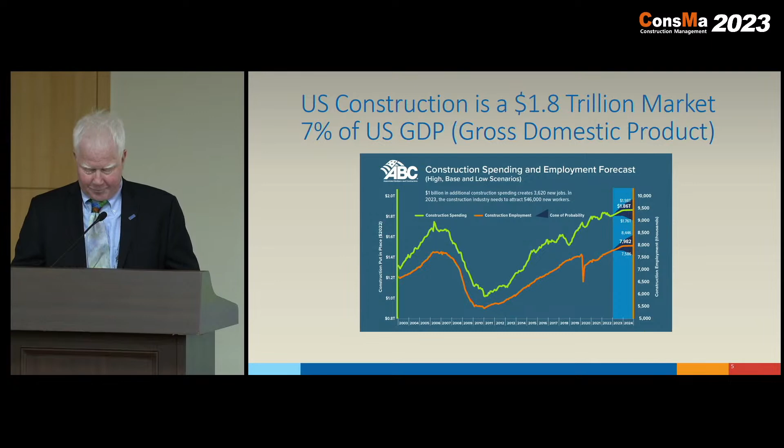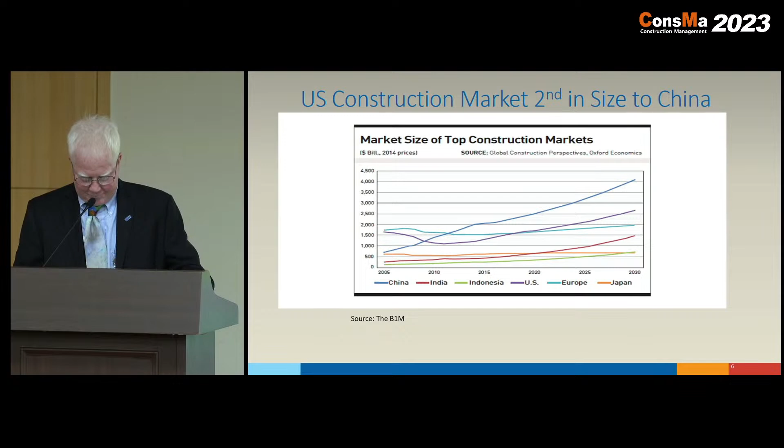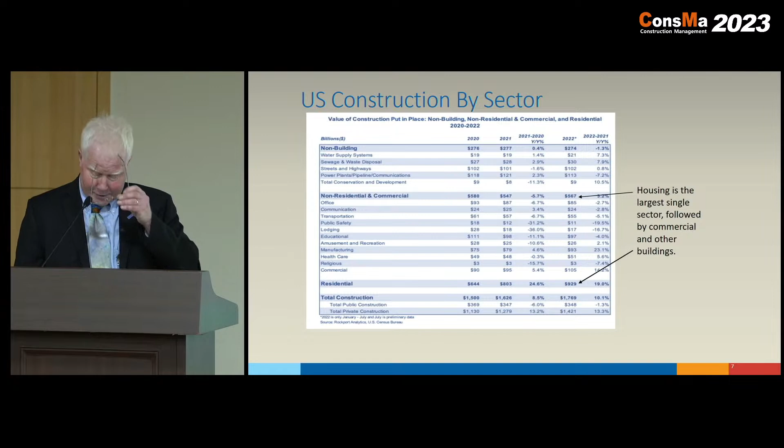Then roads and bridges. In terms of a breakdown between public and private construction, the public market, that of government agencies and public funding, is about $350 billion a year annually, and the other $1.4 trillion is in the private market. About 60% of the public market is focused on infrastructure, roads, bridges, tunnels, treatment plants, that kind of thing. Whereas the private market's major part is housing, followed by buildings and then power.

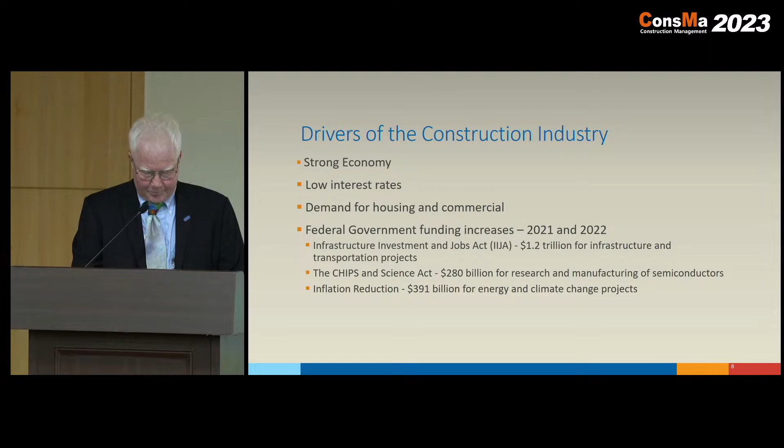We have a very large and diverse construction contractor market in the U.S. as well. Every year, Engineering News Record, one of our leading construction publications, publishes a list of the top contractors in the U.S. So the last list was in 2021, and the top 400 contractors generated about $425 billion US worth of revenue in 2021. Not surprisingly, a lot of that revenue was driven by buildings with 57%, followed by transportation with 15%.

And as I mentioned, the contractors have fully recovered from COVID 2020. And if we look and break down that top 400, the top 100, the revenues for those top 100 range from a low of 925 million to a high of 16 billion. So quite significant, and we have quite a diverse construction contractor community.

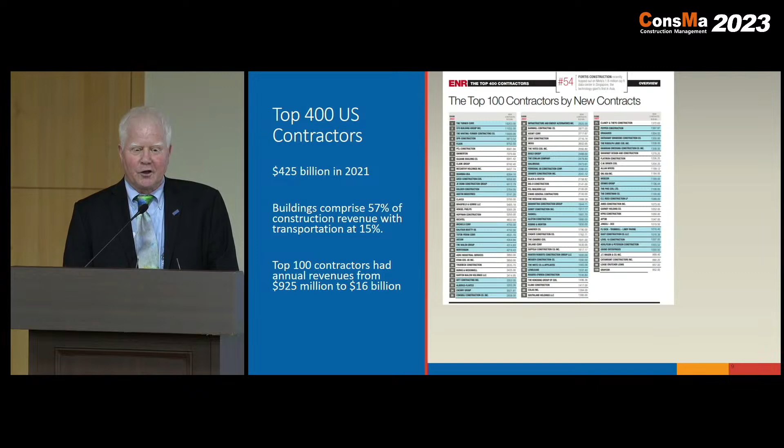But interesting to me, at least, there are no U.S. construction contractors within the 10 largest construction contractors in the world. If you look at that list, 8 out of the 10 are Chinese. So the Chinese contractors are really dominating, at least in the world global market in terms of size. The U.S. is a significant player, but the Chinese really dominate that global listing of top contractors by revenue.

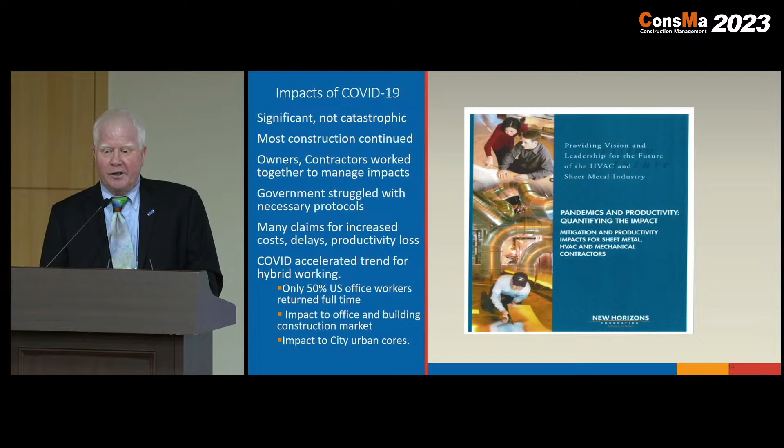As an example, in California, I worked 2 years during COVID on a big wastewater treatment program in San Jose, California, $1.2 billion. In San Jose, the local city, as well as the state of California, issued regulations that required contractors to pay workers who needed to take time off for either COVID because they were sick with COVID, or they had to care for someone in their family who had COVID. And the regulations required the contractors to continue to pay them their wages so that obviously they could continue to receive an income and the construction could continue. So the government struggled, but they worked hard to try and support the construction industry during those tough times in COVID.

One thing that COVID did do was really accelerate a long-term trend that had been growing, which was the way people work. And in the US today, hybrid working is here, and in my view, it's here to stay.

Right now, only about 50% of office buildings in the US are fully occupied by people working full-time in the office. And despite all the efforts by owners and employers to get their people to come back full-time, people don't want to come back, and I don't think they're going to be coming back.

And the implications for the commercial and building market are quite significant, both in terms of future construction. I think that market is going to significantly reduce over time, but also there are a lot of building owners and banks who are holding loans on those buildings that are potentially looking at a significant financial impact. Some people are predicting a major crash in the office building market over the next few years because of this issue of hybrid working and the fact that people just don't want to come back full-time to the office.

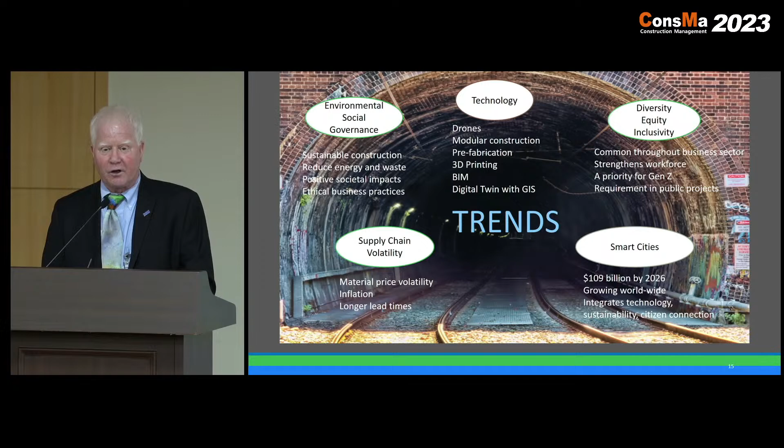I'm working on a military program now, and the military client there is very much interested in building smart cities as part of their military facilities. The focus around smart cities is really to integrate technology, sustainability, and to connect all of the people living in those communities together in a sustainable and efficient way. So I think we're going to see a huge growth in the smart cities movement going forward.

There are also significant challenges, and as I said earlier, there are many challenges. These are 5 that struck me as being significant to the U.S. construction industry. Two of these I consider to be rather immediate, and we really need to try and solve these.

The first of them is around economic issues, the threat of recession we're hearing about, the continued inflation, supply chain issues continuing. The second is, as I mentioned earlier, the workforce gaps, the need for more workers, the need to replace workers who are retiring, the need to do more training. These are immediate issues, but unfortunately, in my view, these are issues that are really beyond the control of the construction industry itself to solve. These are more macro factors, and it's really difficult to predict how they will play out over the next years, but they will have a real impact on the shape of our construction going forward.

The other challenges, I think, are longer term. One is the continuing stagnation, decline in construction productivity. Since 1970, studies have shown that there's been very little growth in construction productivity, and in some places, such as studies have shown in the US, construction productivity has actually declined. It's unclear why—there are many reasons, and no clear solution yet in mind for this.

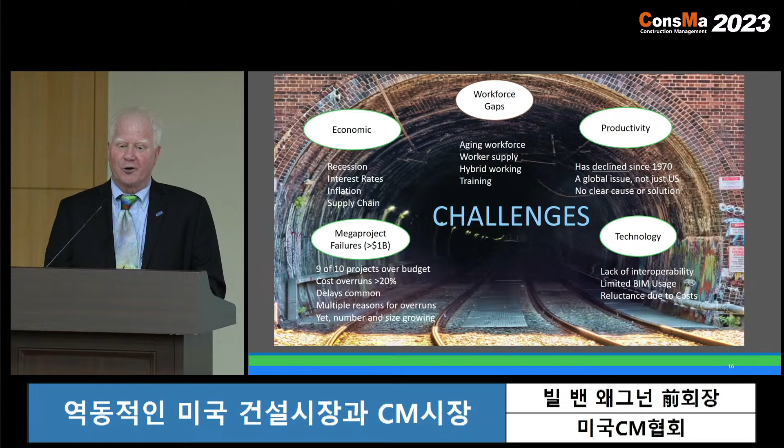But what is interesting is, despite all of the problems and the overruns in megaprojects, we continue to build megaprojects, and in fact, the forecasts are showing that we're going to continue to build more megaprojects, and the projects are going to get bigger over time. So that's just something that we in the construction industry are going to have to deal with, because I don't think there's a ready solution for that right now.

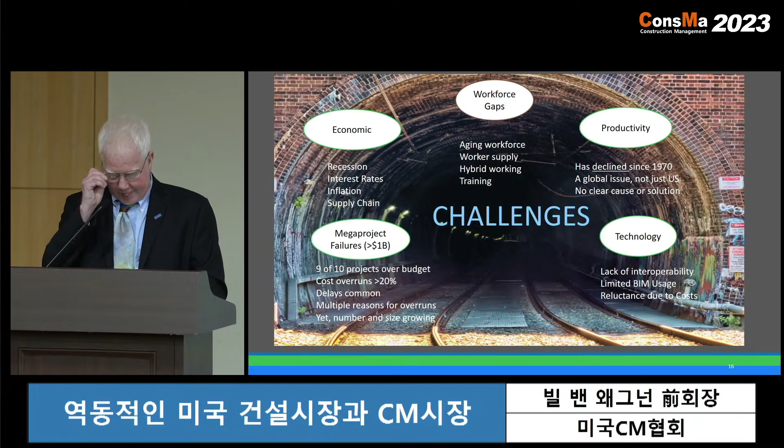So let me turn a little bit to the US CM industry, just a brief overview of where we are in the construction management industry.

Like construction, program and construction management are doing very well and are showing solid growth, having fully recovered from COVID. ENR publishes annually a listing of CM and program management fees. In the last issue, for 2021, $24.5 billion worth of program and construction management fees were generated by CM and program management professional firms in the US. Of that, over $16 billion was in program management, and nearly $8 billion was in the construction management profession.

That breaks down, if we want to split it between international and domestic, about $18 billion is in the US and about $6 billion internationally. So it kind of indicates to you that, like our contractors, we are very much a US-focused industry. We do a lot of work internationally, but unlike other countries, much of our construction business is really driven by demand and need in the US itself.

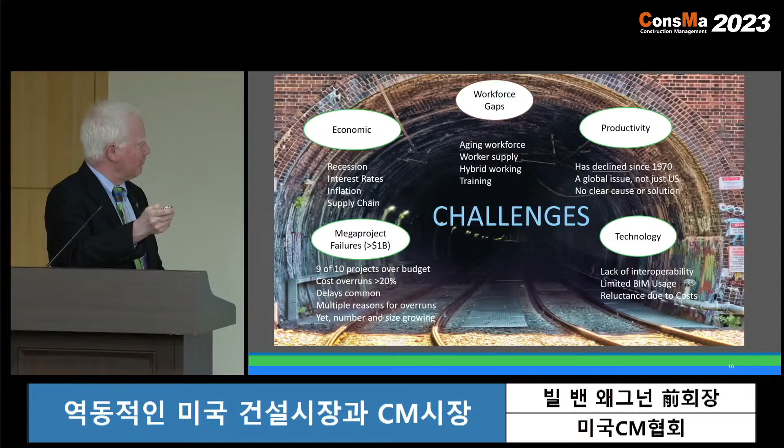I have one more slide. I don't know where I'm... okay, there we go.

Thank you. All right, big unknown, artificial intelligence. I'm sure many of you have been hearing about this. Some experts and pundits out there are predicting that artificial intelligence is going to be a major transformation to mankind on the order of some of the other major transformations over the history of man. Time will tell, but I can tell you from what I've been reading and seeing that it is moving very, very quickly.

To give you a personal story, in putting this presentation together I spent quite a bit of time collecting research material from a lot of different sources on the construction market, CM, and so forth. After I did that, I signed up for ChatGPT. Many of you may have heard of ChatGPT. I went in there and typed, give me a 5-page paper on the state of the US construction market and the trends and challenges. I was shocked, it nailed it. It covered everything that my research had found, and it was very accurate, very few mistakes in there. So that's just one small example.

But I think AI is real. I have no idea how it's going to impact construction, but I'm certain it's something our industry is going to have to deal with, just like other industries across the world right now. I think it's here and it's going to continue to grow. So with that, I want to thank you very much for listening and being a great audience, and I really look forward to the other presentations for the rest of today and tomorrow. Thank you very much.

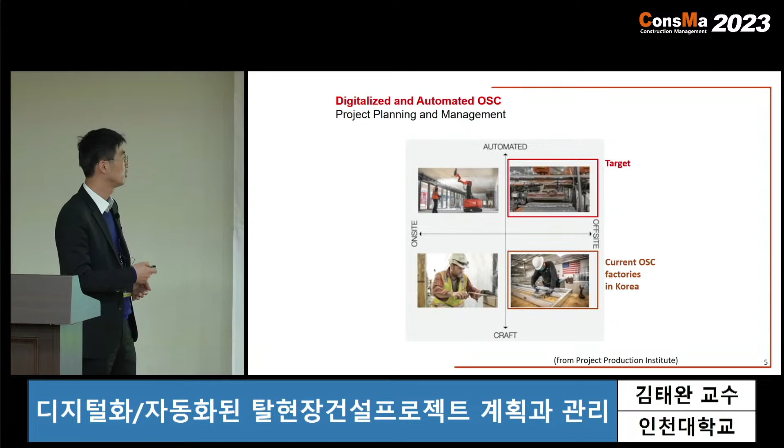The question comes down to how to do that. I don't know actually, but one answer might be digitalization and automation of offsite construction projects. This figure is from the Project Production Institute, and it suggests two dimensions: one is on-site versus off-site, and the other is automated versus craft or manual. According to these two dimensions, we have some construction projects that are on-site and automated, and some projects that are off-site and manual.

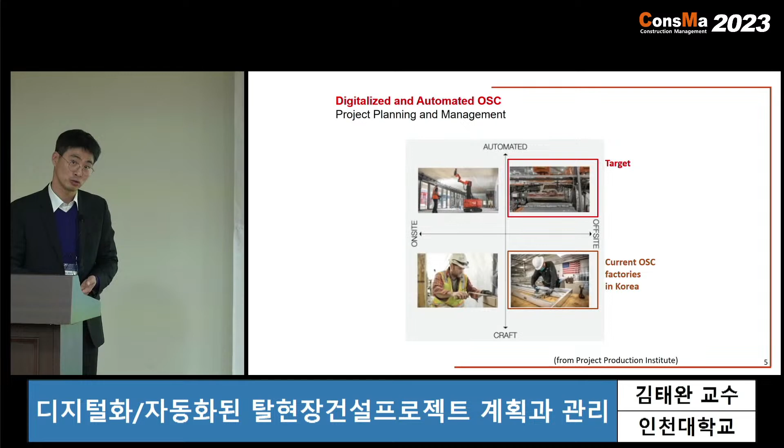My observation is that in Korea currently, most offsite construction project factories are off-site but craft, meaning they are producing building components manually under the roof. So we are still having some productivity issues. My goal, my view, is that we need to move towards automated offsite construction project management.

This digital data can be interpreted by computer without human intervention - that's the benefit of digital data. Digital data can include BIM (building information model), and also workplace models, process models, and supply chain models, etc. When we have these models digitalized, capturing the reality, then artificial intelligence comes in, with data science.

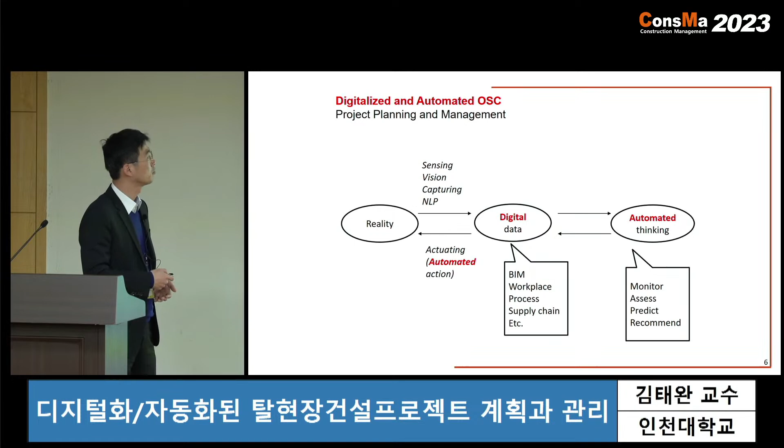Building information model can play an important role in the digitization and automation of your project. I did some study using real case offsite construction project cases, called qualitative comparative analysis. The goal of this research was to find some leading indicators that can cause schedule delay in your project. I took QCA, qualitative comparative analysis, as a method because it can give you some idea about the combinatorial effects of different project conditions - with the combination of some conditions, you can actually see some effects.

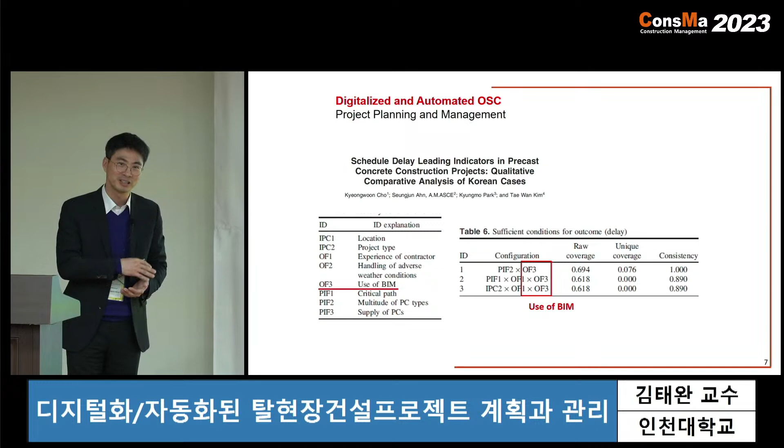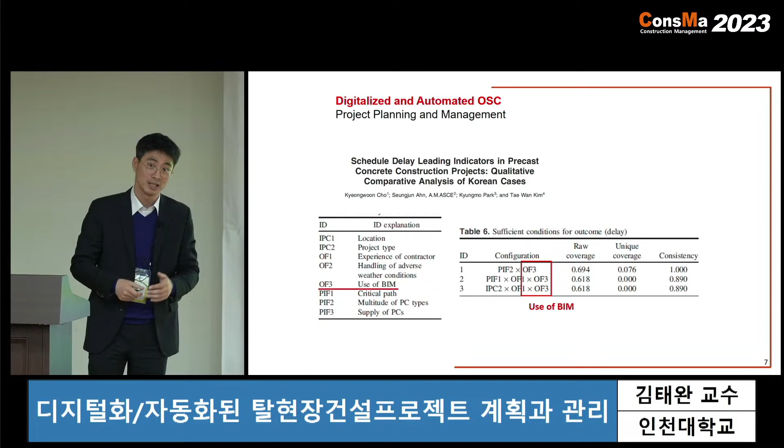So it means that if your project doesn't use a BIM and you have little experience in offsite construction projects, your project is likely to be delayed. Or if you don't use a BIM and you have multiple types of precast concrete components to handle in your project, that reminds us of complexity, and then your project will likely be delayed.

Okay, so BIM actually is still playing a fundamental role in the offsite construction project.

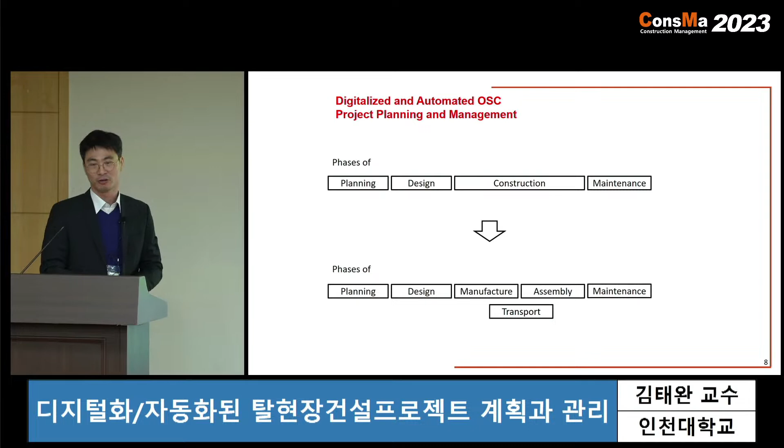Let me talk about the project planning and management of offsite construction projects. Let me talk about the phases first. As a construction manager, we divide our project into different phases when we think that major deliverables are very different from phase to phase, and the way of work is very different from phase to phase due to the nature of your work. You need to manage it differently from phase to phase, so we divide our projects into different phases.

Traditionally in the stick-built construction system, how we divide our project into phases is like this: we have planning phase, design phase, construction phase, and maintenance phase. And we try to manage each of the phases.

When we shift our gears and move towards offsite construction project management, some phases are very similar - so planning, design, and maintenance phases. But the construction phase should be divided into several phases because many parts of your building components are now produced in a factory environment. Then it can be divided into two: manufacture phase and assembly phase.

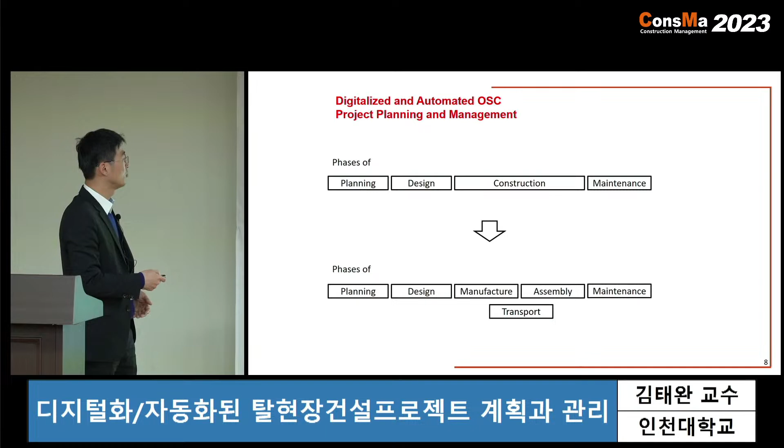In the manufacture phase, the major deliverables are the produced components that are stacked at the factory. In the assembly phase, the major deliverable is your final building, where all of those components come and are installed into one piece. Because the location of production and the location of installation are different geographically, we need to add one more phase, called the transport phase.

Transport phase is very important in offsite construction project management because the transport cost takes only 5 to 10% of your project, but failure in managing this phase can lead to a disaster situation for your project.

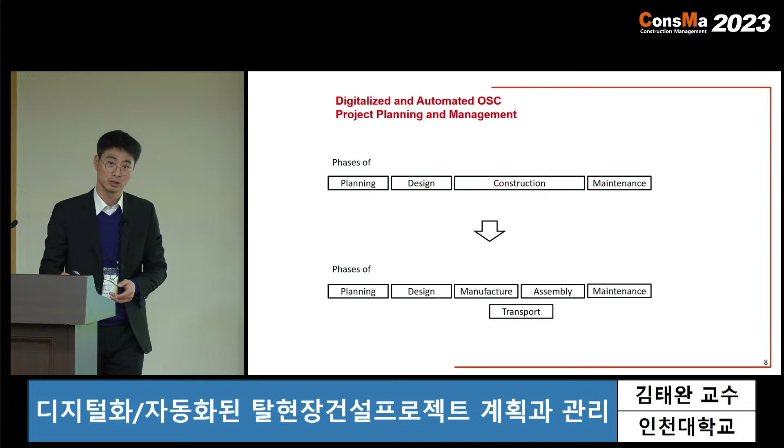So let's assume we are a construction manager. You are on the job site, and you need to do some work according to the schedule. What can you do when some components are not delivered on time to your job site? All you can do is wait until the components are delivered. So it actually causes a lot of damage to your project, but we have little knowledge about how to manage this transport.

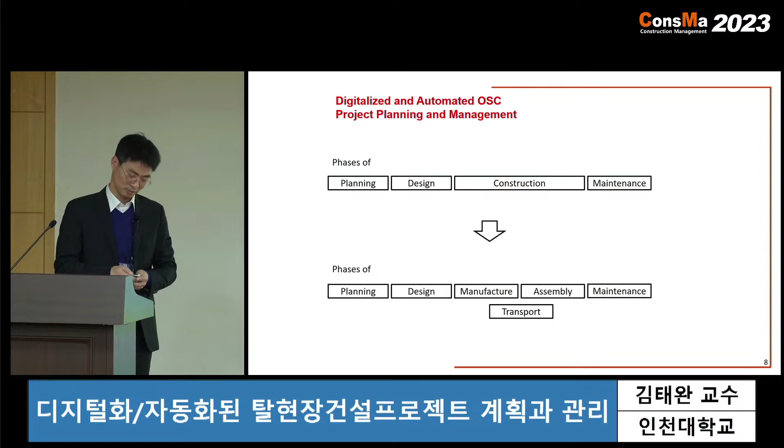So many researchers put research effort into offsite construction project management, but most of the effort is focused on manufacturing and assembly phases. My expectation is that researchers will cover all of these phases with more and more effort in the future.

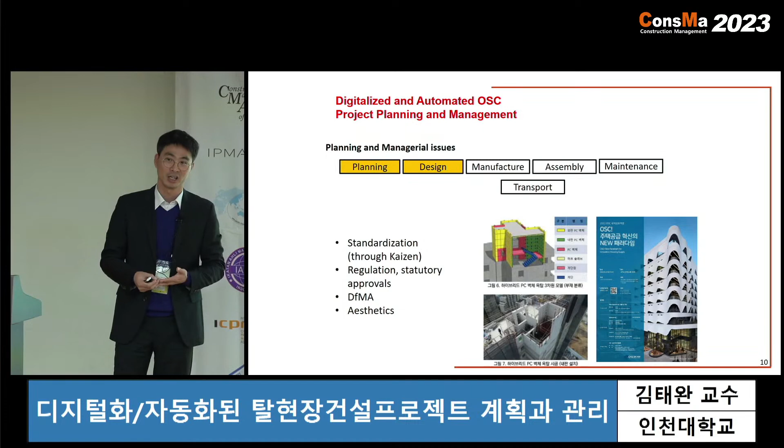DFMA, design for manufacturing and assembly, is another big topic. This is different from constructability, because now we need to think about ergonomics in the factory environment and the construction environment in different ways. And aesthetics—some people still think offsite construction produced buildings are ugly. Somehow we need to prove that this is not always the case. That's the issue I can think of.

In the manufacture phase, this is actually a difficult part in managing offsite construction projects, because in many cases we have little knowledge about how to manage the manufacture phase. One is mold scheduling, which is very important because it affects production productivity in the factory. Many researchers are optimizing mold scheduling, but my observation is that construction managers or production managers still use their gut or intuition to develop this schedule. We are human beings, so we are error prone.

There must be a lot of other good solutions for scheduling molds, but we are losing those chances. And factory yard utilization—one factory has multiple job sites, so you produce components for different projects and stack those products on the yard. But we still don't know how to manage those yards, so we are spending a lot of land. Sometimes we have difficulty finding exact locations for each component, and quality management. So we need to know how to utilize our yard and factories.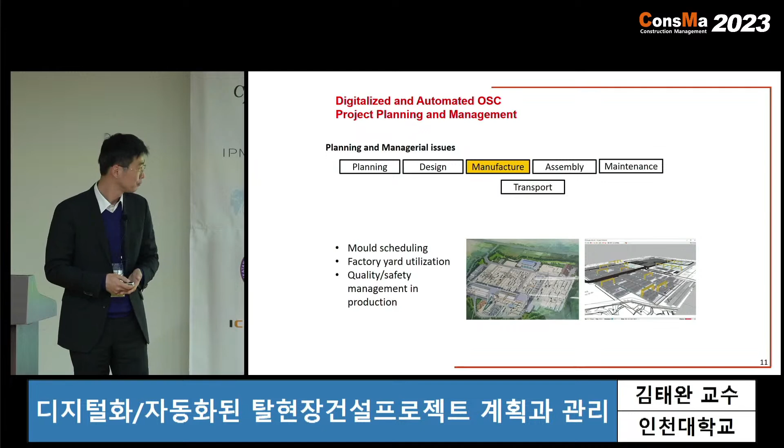Quality and safety management in production is also another issue. When we think about the factory environment, it should be very similar to management sciences dealing with manufacturing industries like smart factories. Those two are very similar, but the major difference between the manufacturing industry and our industry is that each component we are making is very big and heavy to handle. We need to think differently about the ergonomics of people making those components, and specialize in our own way in managing factory production.

In the transport phase, supply chain and logistics management is getting more and more important worldwide across all industries. We are facing different opportunities and challenges in our project management. This is another big issue we need to solve.

Routing and tracking—you need to make decisions on delivery routes and track where those trucks are. Korea has a small land area, so this is not a big issue there. When you order food at night, the next morning the food is in front of your door—wonderful, right? So it's not a big issue. But when your country has a very big land area, like mainland China or the US, this is another issue you need to handle carefully.

Component vehicle allocation—you don't put all the materials for one project into one truck and send them all to the job site. You need to order multiple trucks and allocate different materials to different trucks. This affects the number of trucks, the installation sequence, and productivity at the job site. We need to allocate components properly onto different vehicles, but we still have little knowledge about how to manage these issues.

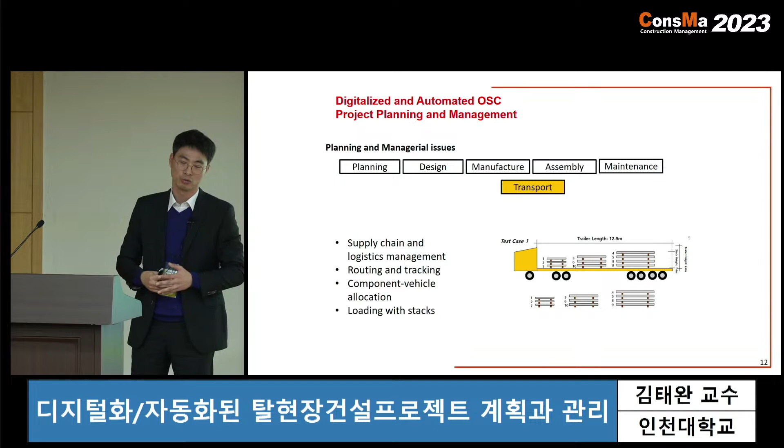Loading with stacks—because the truck has limited space, we stack components to save truck space. Stacking isn't easy, because ill-stacked components cause instability problems and affect the quality of components. When you deliver materials to the job site, they may find defects in your components. It also affects installation at the job site—when they have an installation sequence that differs from your stack sequence, the job site needs to handle those differences to place materials at the final location.

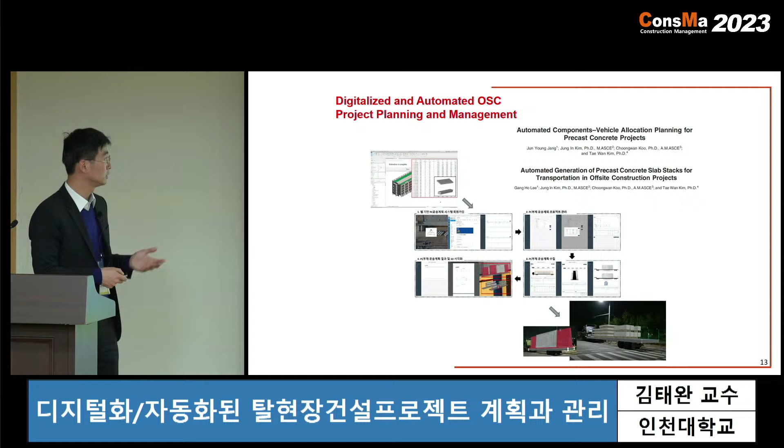I have conducted some research and then developed a tool to help construction managers in the transport phase. This is an example of how we can help people.

Using the Revit API, we can export important component information from BIM directly. I developed a tool that can generate transport plans. It can automatically allocate components onto different vehicles properly, and then develop stack generation plans.

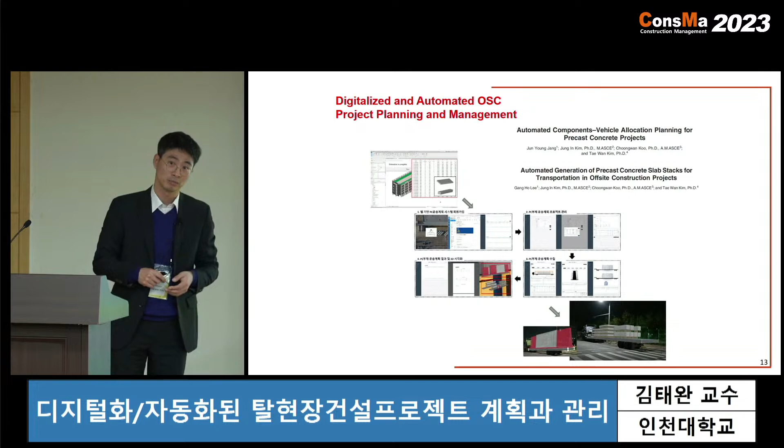Using the HoloLens or the AR gadget, you can see the transport plans on the real trailer, how those are stacked and put. This can help transport managers and construction managers develop and finalize transport plans.

And assembly phases, right? In assembly phase, we need assembly modeling and guidance for the installers. Assembly model is different from BIM because it needs to provide information on what sequence you need to install, and when and how.

With those detailed plans, you can reduce mistakes, and it can enhance productivity on the job site.

Installation sequence still depends on the intuition of construction managers, that's what I have observed. With different types of materials, components, locations, and logics, there can be multiple ways of sequencing the installation. But under time pressure, construction managers just manually and intuitively develop the installation sequence. Sometimes it's not productive, that's what I have observed.

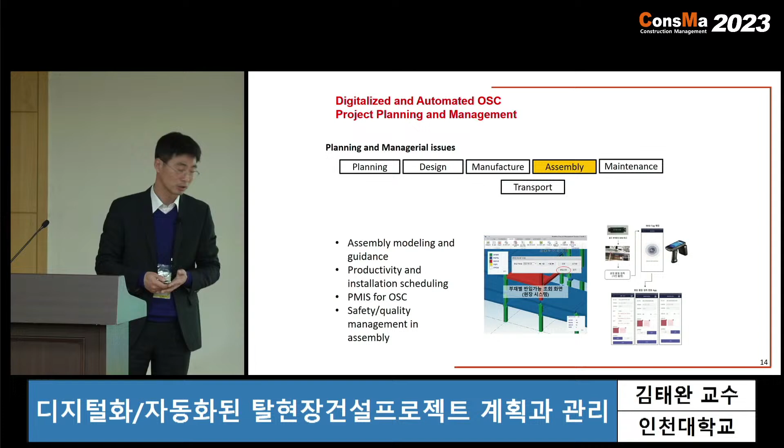I went to the job site and measured how long it takes to install each and every component on the job site, and then asked the managers about their expected time for installing these pieces. The answer was that it takes 3 to 7 minutes to install each element, so they plan based on that assumption.

But the reality, from my observation, is that many elements are installed outside those expected ranges. This is just one case study, but what we can say is that we need more real case data. We have little data about how we install and manage installation in offsite construction projects.

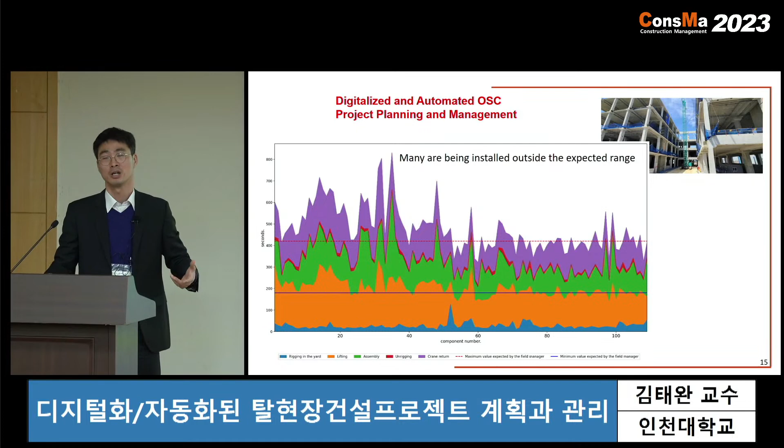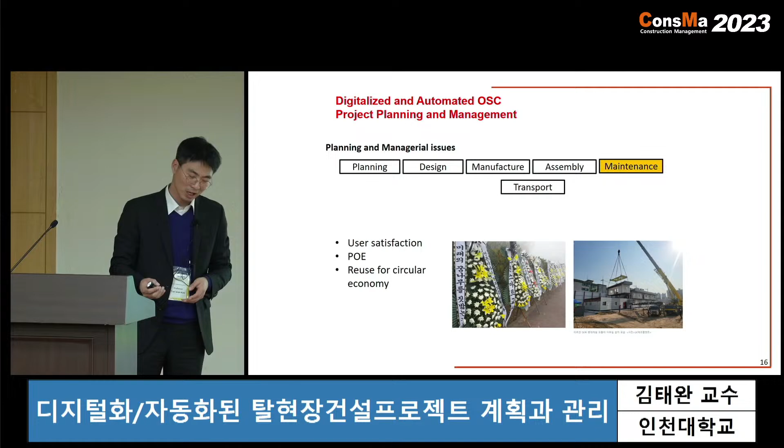We need to gather more data, analyze it, and acquire more knowledge about how we currently manage, and how we can improve those management techniques. That's why we study again and again and put our efforts into the research.

Lastly, the maintenance phase. We need to gauge user satisfaction and boost it up, because they are the final users of the building. Without their approval, it's very difficult to adopt offsite construction in our industry.

It's a different story than the productivity issue. We need to persuade people so they can accept the concept of offsite construction. We also need post-occupancy evaluation, and management technologies or techniques for reusing and recycling wasted materials for circular economies.

All of these topics are challenges that prevent us from gaining the full potential of offsite construction projects.

When the car was invented, people said there were a lot of challenges to overcome, that this is not possible, that they preferred horses. People resisted using cars. But now, what I see is all cars on the road, we don't see horses regularly anymore. I like horses, but we can't see them on the road regularly.

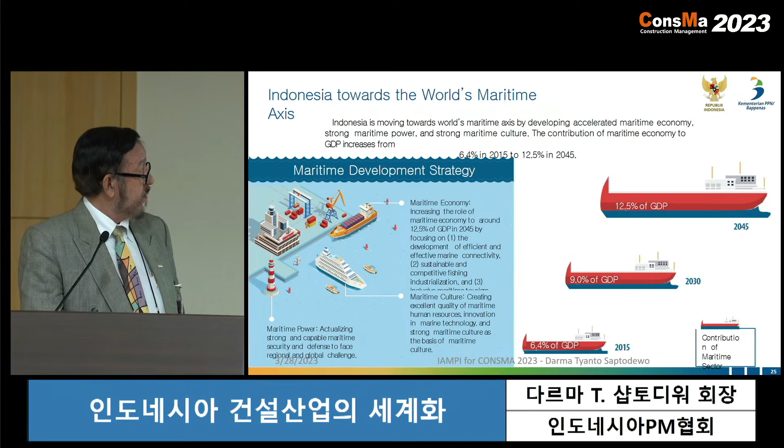Enhancement of water security is one of the environment strategies. Water security is increased to support strategic sectors, disaster mitigation, and increase community welfare. So we will develop processing and water quality enhancement technology that is cheap and environment friendly.

Development of rainwater harvesting, improvement of land management along river basin areas by involving the community, development of city forests, integrated and sustainable management of lakes, swamps, ponds, rivers, and other land water, forest and land rehabilitation along priority river basin areas, development of infrastructure to prevent erosion and sedimentation, development of water resources infrastructure, implementation of water use efficiency principles through reduce, reuse, and recycle principles, improvement of hydrology, hydrometeorology, and hydrogeology information systems, and development of river basin area and water resource monitoring systems.

Regarding energy security, we will increase renewable energy from 5% in 2015 up to 31% in 2050. But the rest will still have natural gas, coal at 25%, and oil, with the possibility of using nuclear energy if other energy sources do not meet demand. But this is the last choice, to build nuclear energy only if it's needed by the infrastructure development of the country.

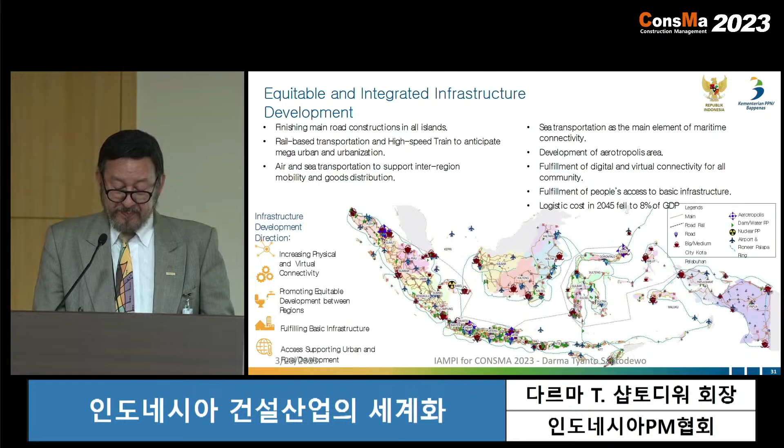Strengthening national resilience and governance. National resilience and governance become stronger with better quality democracy, institutional and bureaucratic reform, development of the national justice system and anti-corruption, implementation of free and active international politics, and strong security and defense.

Foreign affairs: the implementation of free and active international politics. This will be the strategy for Indonesia, increasing its role regionally and globally in the United Nations. Indonesia is conducting international politics that is free and active to build just world governance, becoming a developed and independent country and one of the most influential countries in the Asia Pacific. International politics is also directed to implement the World Maritime Axis Roadmap and establish regional arrangements, including maintaining ASEAN centrality.

We also have defense and security: inclusive community order, strong defense, and dignified human security. Indonesian identity goes beyond ethnic, tribe, religion, race, and group identity, with a participative community order based on fairness and equality in unity and national insight. Strong national defense power is based on smart power, with an expenditure of 1.5% of GDP.

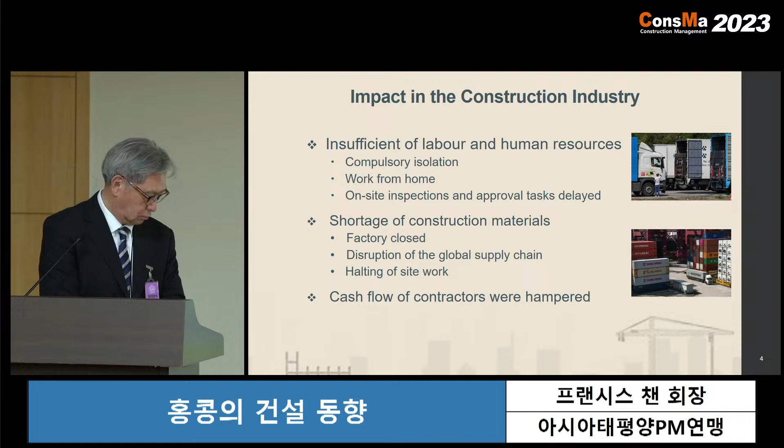Under the novel coronavirus epidemic, many industries in Hong Kong were affected. The Hong Kong government launched 2 rounds of anti-epidemic funds, providing a total of over 5.5 billion Hong Kong dollars to support construction workers and other enterprises, strengthening epidemic prevention and helping with economic difficulties.

Normally, government works contracts contain provisions stipulating completion deadlines to ensure the timely completion of projects. In case of any delay, contractors are required to apply for an extension with convincing reasons. During the COVID-19 period, the government understood the difficult situation, from project design, manpower deployment, supply of materials, to the construction process - all these aspects affected project progress.

Because of substantial impacts caused by different waves of the epidemic, the Development Bureau of the Hong Kong government announced that for in-progress government works contracts, the government would flexibly handle extension requests from contractors for up to a maximum period of 6 months.

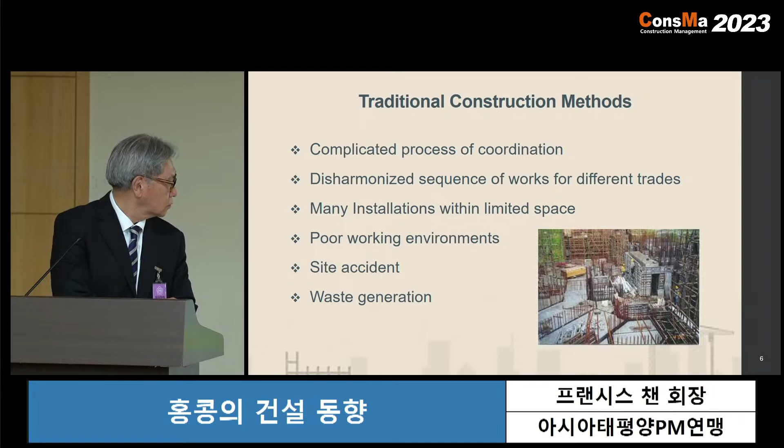Although today's MIC provides a solution for several problems in the construction sectors, it was not so popular in Hong Kong before COVID-19, even with many promotions from governments or related associations. As mentioned previously, during the almost 3 years COVID-19 period, the industry faced a lot of problems such as lack of workers, shortage of construction material, etc.

In order to complete projects in time with the required quality, more building developers and contractors try to adopt MIC in private projects. Most of them find that MIC methods not only save construction time with better quality compared with traditional methods, MIC methods can also minimize unpredicted problems, such as reducing injuries and accidents.

During modular construction, modules are constructed in the factory and site works can be operated at the same time. So the construction speed also increased and shortened the project lifetime. This also helped to solve the huge housing demand problems in Hong Kong.

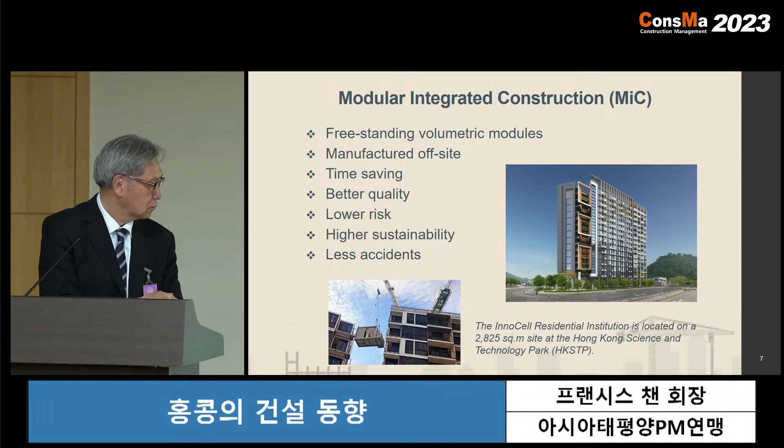Multi-trade integrates mechanical, electrical, and plumbing. This is considered a continuation of the success of MIC for the construction industry, which refers to the integration of multi-trade building services components into a single assembly of prefabrication modules.

Similar to MIC, MiMEP is manufactured in a factory and then transported to the site for collection of modules. Various trades of building services only need to install it in situ. The MiMEP construction method has the benefit of reducing on-site labor demand and not being affected by site constraints.

With the adoption of these two innovative construction methods, it can not only contribute to enhancing the quality of construction and mitigating environmental impacts like carbon emissions and waste generation, but also help relieve the challenges the Hong Kong construction industry is facing, including the demand of workforce, aging of skilled labor, site safety, and high demand of construction productivity, especially in challenging times.

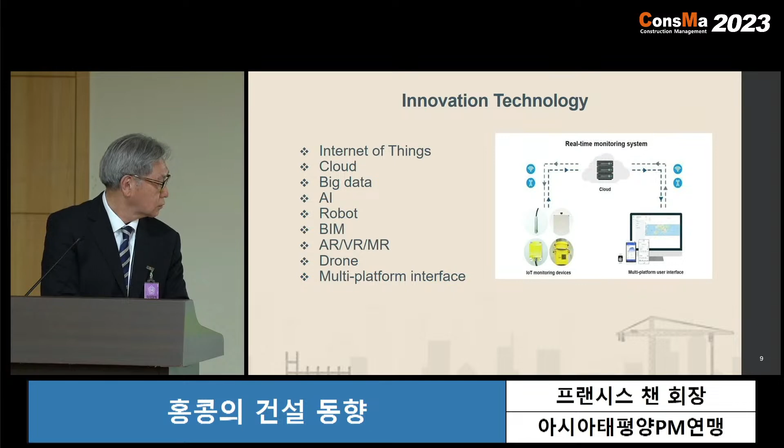BIM, as you may know, is a process that has revolutionized how construction projects are planned and executed. It allows the construction manager to create virtual project models that can be analyzed and modified before any physical work begins, so many of the inefficiencies and problems that arise during the construction process can be eliminated.

Digital BIM models allow for sharing, collaborating, and visualizing that paper drawing sets do not. With cloud-based tools, BIM collaboration can occur across all disciplines within the project, allowing working teams to share project models and coordinate planning, ensuring all stakeholders have insight into the project.

Cloud access also allows project teams to take the office to the field. Project teams can review drawings and models on site and on their mobile devices, ensuring they have access to up-to-date project information anytime, avoiding last-minute changes, and minimizing unforeseen issues by enabling easy reviewing and commenting across multiple disciplines.

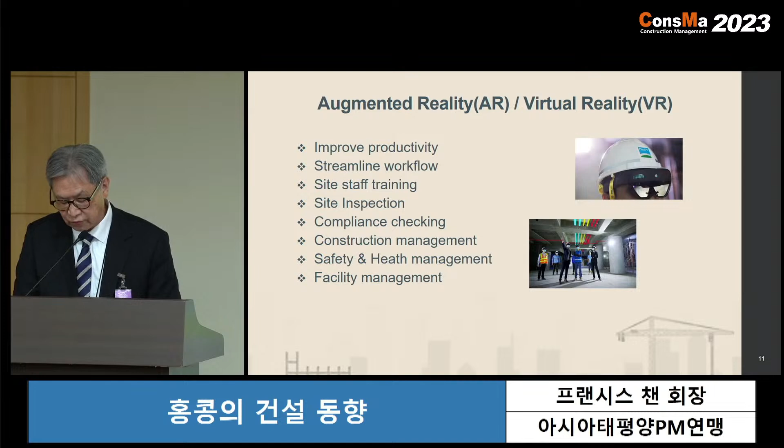With 5G connectivity to support large BIM files and live video streaming, Microsoft HoloLens can demonstrate and visualize planned building works within limited working space at site, without removal of the ceiling. It integrates the BIM model with actual work at site, providing clear visualization. This remote inspection provides real-time information for stakeholder meetings at their locations.

A drone is a remotely piloted aircraft technology development. Contractors and engineers can use drones to collect real-time data about projects and understand what is happening on their site. Project managers and site inspectors can also use drone technology to conduct job site inspections, identifying potential hazard risks on their work site from different angles, with no need to go to the site physically. A drone can also fly into hard-to-reach areas, reducing potential accidents and improving job site safety.

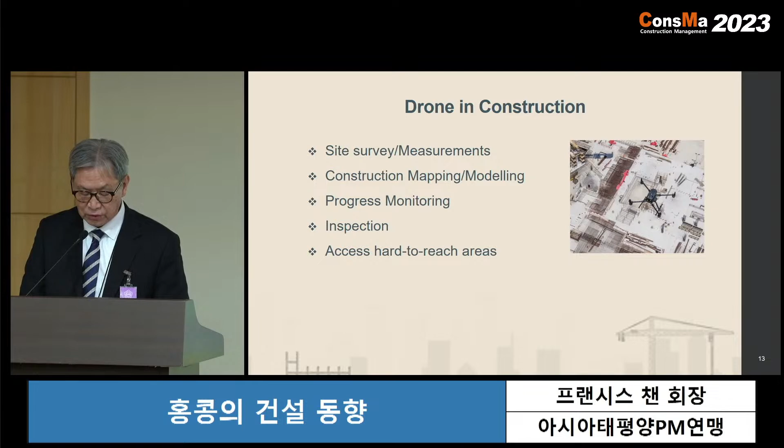For aerial photos, the drone takes photographs of the entire construction site from the air. The result may be slightly less detailed than interior reality capture because they typically work with photography instead of laser measurement. Despite this, once the photos are gathered by flying intricate patterns over a project, they are combined using a photogrammetry method to create 3D models. Some objects, such as trees and power lines, can also be captured. This information can be used in the design process, such as doing a cut and fill analysis of a site. Architects and engineers may discover that less soil needs to be moved on large projects, ultimately saving on cost.

The Access Control Recording System, or ACRS, combines MIC contract, AI technology, and contactless biometric identification. All site staff only scan their faces without touching anything when entering or exiting the site. All related data is generated and recorded automatically, and is very precise even under varying light conditions. The data can be used for site staff management, such as calculation of overtime pay and workers' attendance.

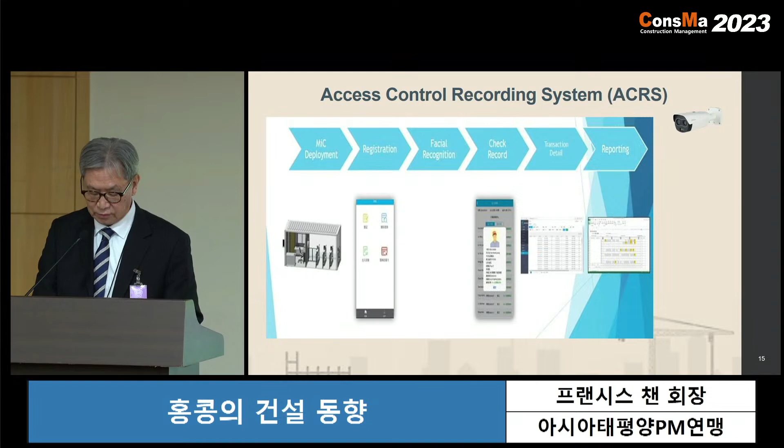From experience, the gate entry process takes only 3 to 5 seconds on average, and registration takes only within 30 seconds. Compared to the traditional entry system, entry time was reduced by 50 to 70 percent. It is efficient for human resources management, such as real-time access to site attendance records and workers' information. Through automatic data analysis, it is easier and more accurate for manpower allocation.

In terms of health monitoring, all staff need to pass a body temperature screening before entry. The system also performs temperature measurement with an accuracy of plus or minus 0.03.

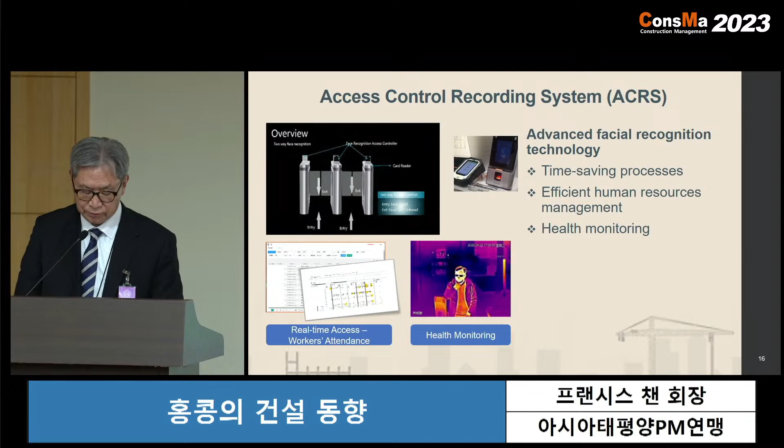The following slide shares some significant functions of a digital construction management system that has been used in one of the third runway projects.

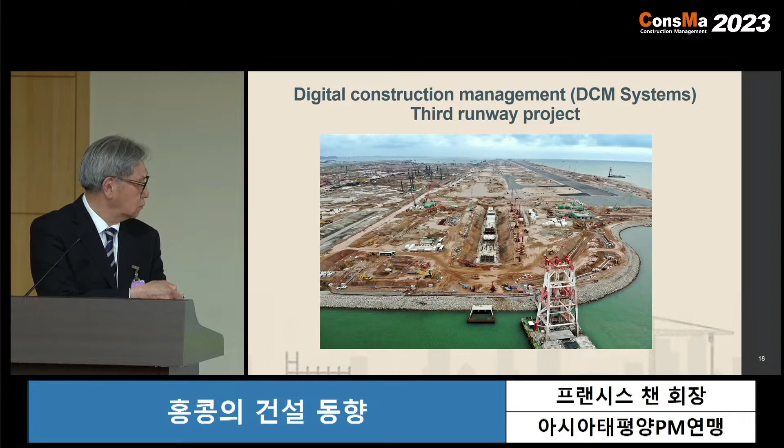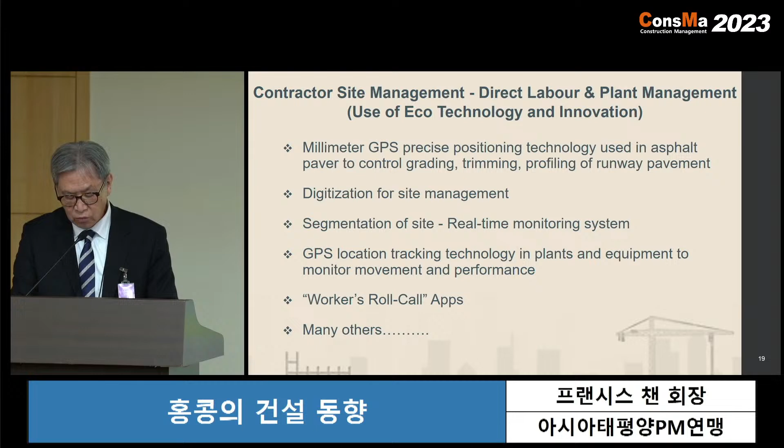Contractors. This DCM system integrates different technologies, including millimeter GPS precise positioning technologies for real-time site management, such as location tracking in plants and equipment, monitoring movement and performance of site works, and control of asphalt paving workers' roll call apps.

This is SLAM, simultaneous localization and mapping, 3D scanning. SLAM is an algorithm that uses data from mapping systems and onboard sensors such as LiDAR scanners and RGB cameras to trace the tracking movement of site works. Compared with traditional surveys, the project used 3D LiDAR-based SLAM, significantly saving round-trip time for every boat trip.

Because the SLAM 3D scanning system provides an innovative scanning function, there's no need to take measurements on each truck, since the waiting time and turnaround time of the trucks can be reduced, so fuel usage is also reduced.

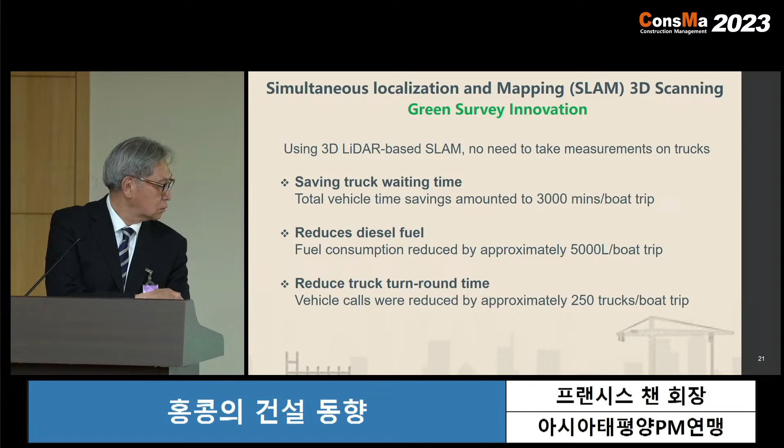By integrating satellite positioning and AI technology, the DCM can help coordinate traffic at the construction site. Through AI calculation, the system will recommend the most suitable vehicle route. If the DCM detects a problem with road conditions, such as accidents or roadblocks, it responds automatically, and the accuracy can be controlled within 2 meters.

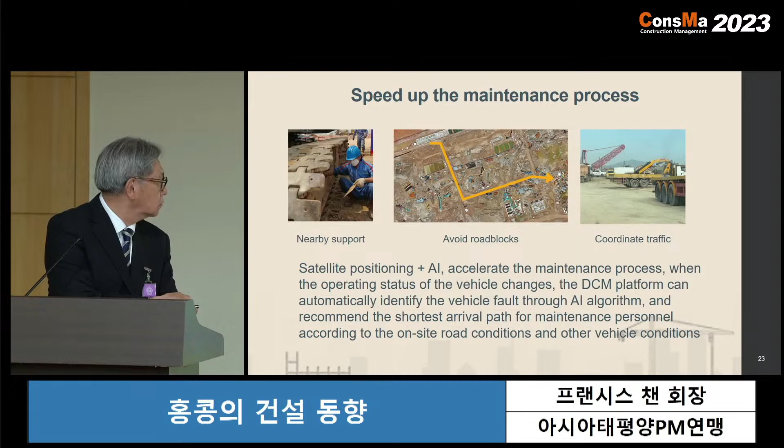Under the premise of clarifying the ownership of equipment through management of equipment entry and exit, the project manager can note the historical operation status of all vehicle equipment on the digital map. This can help troubleshoot and prevent possible failures.

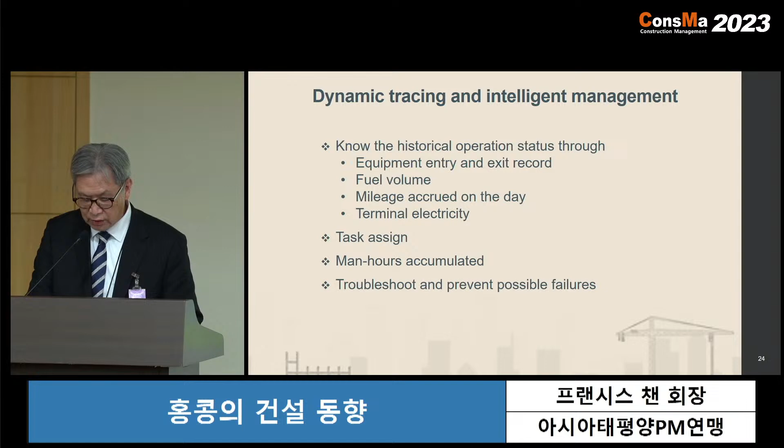These platforms can also quickly show the working status of workers and distribute daily work through a task delivery function. The operation status can also be calculated from cloud data records, so the operation efficiency of equipment such as fuel volume, terminal electricity, etc. can be verified. AI can identify all this and notify the appropriate departments to follow up.

Okay, this is part 3. As I mentioned previously, the aging population and lack of labor force in Hong Kong, especially in the construction industry, will become a serious social problem.

In addition, there are a lot of old residential buildings and imbalanced spatial distribution of homes, including job opportunities. In order to tackle these problems, the government needs to meet the requirements of the changing world. A lot of challenges need to be focused on.

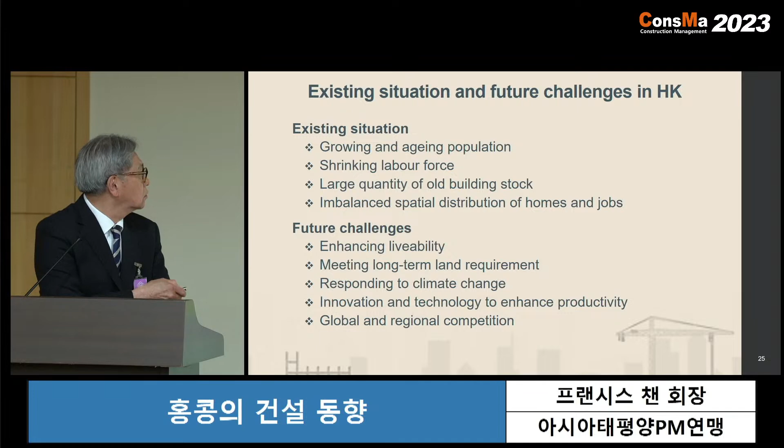Hong Kong 2030 Plus is a strategy study for updating the spatial development for Hong Kong's future. It provides a strategic spatial planning framework for future planning of land and infrastructure development, shaping the built and natural environment, aiming to lead Hong Kong to become a livable, competitive, and sustainable city beyond 2030.

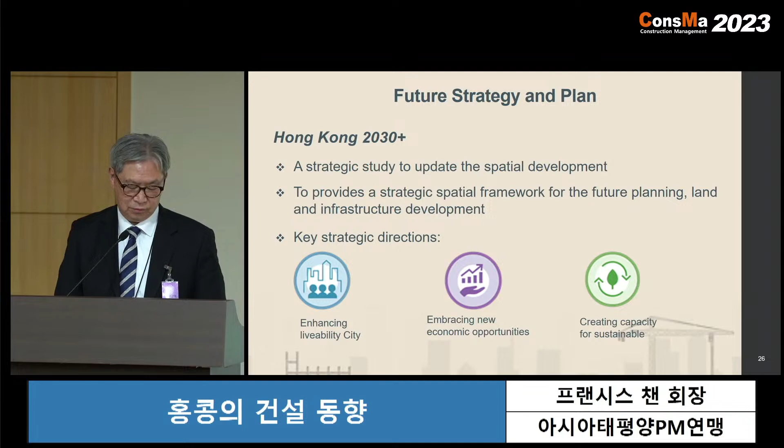The 2030 Plus covers a wide range of developments in different sectors and fields. It provides many opportunities, including construction projects and job opportunities. The aims of 2030 Plus include rectifying the estimated land shortage, building livable new communities, retrofitting dense and old urban cores, planning new employment nodes, bringing jobs closer to homes, contributing to a climate-ready and biodiverse city, and improving overall connectivity within Hong Kong and the world.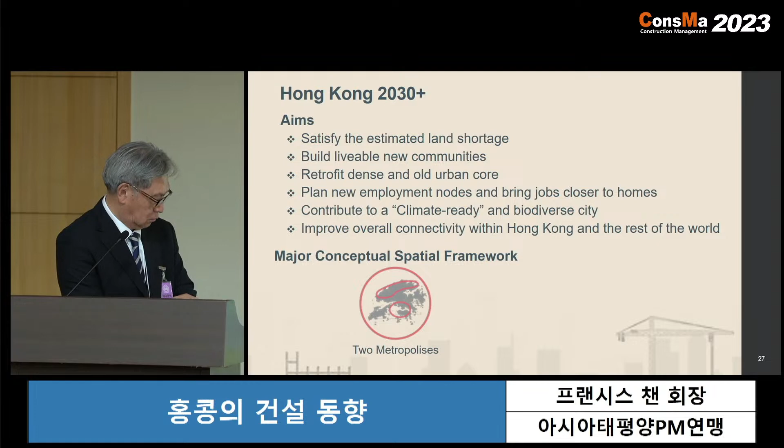This is the Harbour Metropolis policy. This is a circle, and at the top is the Northern Metropolis, forming a major framework of 2030 Plus.

This is the Harbour Metropolis, covering the existing metro areas and future artificial islands, including future artificial islands in Central Waters. In the existing metro area, a more livable environment is to be achieved through stepping up redevelopment and rehabilitation of aging buildings, and improving public areas to provide more facilities to the community, aimed at thinning out the population in the longer term.

Economic competitiveness would be further strengthened through consolidating the traditional Central Business District 1 in Central and adjoining areas, continuously transforming Kowloon East into a dynamic Central Business District 2, CBD2, as well as continuous development of additional business offices outside CBD1 and CBD2. To meet the long...

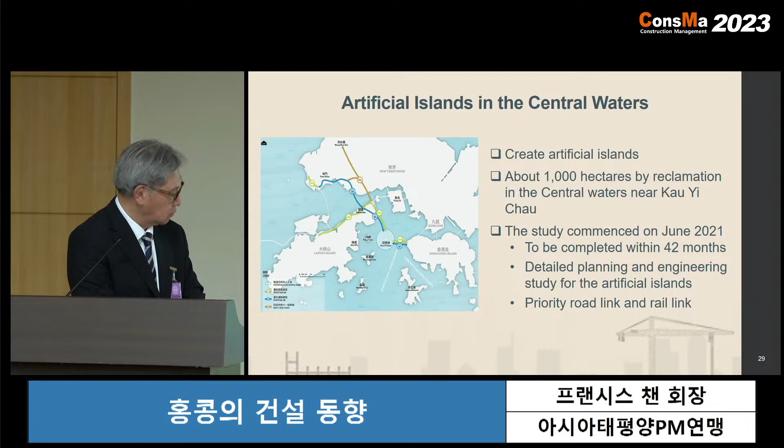This is a future CBD3, the future artificial islands. Now it's just only these small islands, and then all the reclamation.

The Kau Yi Chau Artificial Islands project consists of three islands, 1, 2, 3 (A, B, C), separated by V-shaped sea channels. These islands provide

190,000 to 210,000 residential flats to accommodate up to 550,000 people. The development will be based on a 15-minute neighborhood concept, divided into residential and core commercial districts, offering around 270,000 positions for work. The residential district will occupy 25% of the whole project area.

The commercial district will occupy around 100 acres. It will provide 4 million square meters of business buildings.

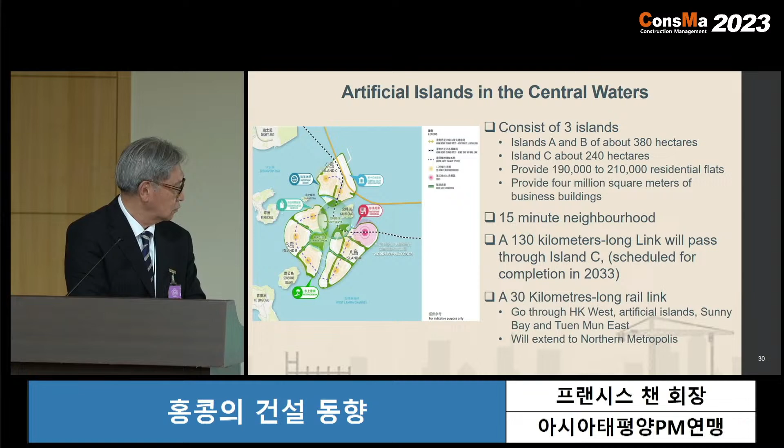The study profiles include the environmental impact and recommendations for the islands' development and the expressway from Hong Kong Islands to northern Lantau. In addition, other major projects such as breakwaters, railway stations, water treatment works, sewage treatment works, etc. are also included in the study.

Now, another metro policy: the northern metropolis covers a few mature new towns located in the northern part of Hong Kong, and some new development areas with a total area of about 30,000 hectares.

The northern metropolis, when fully developed, is expected to have up to 926,000 residential units, accommodating a population of about 2.5 million.

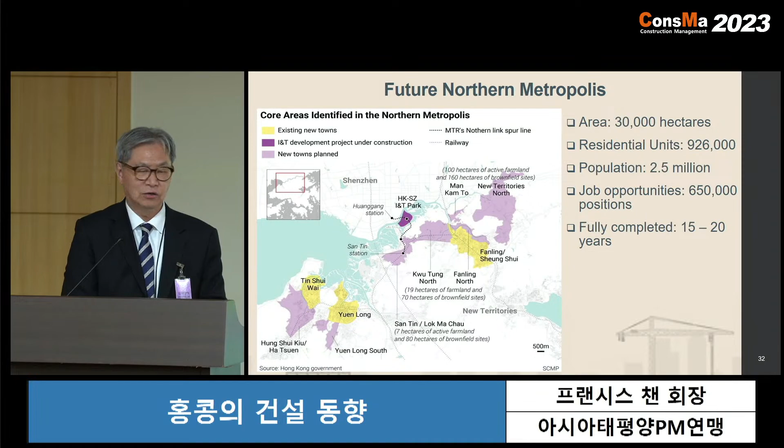Both metropolises that the government has already announced will go ahead. The adoption of new construction methods and new technologies in the construction industry will become an important trend in Hong Kong. That's all my sharing. Thank you.